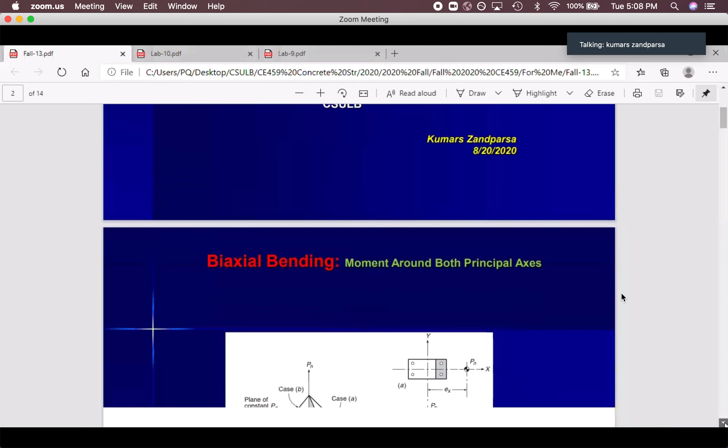Okay, let's go after this. Most of the time, the column has directions. Let me plot something here to make that more clear. Imagine if we have a frame, one story frame. When you put load here, you will get a bending moment on this column in this direction, around this axis. That's the moment based on this load. If we put load, it will bend the column like this.

But most of the time, a frame has two directions, so you have frame at that side, and also you have frame here as well. So you have some load here as well, and it can bend the column in the other direction. In this case, if I follow this line, we will get another moment around that axis. So you will get moment around both axes, around y and x, as you can see here.

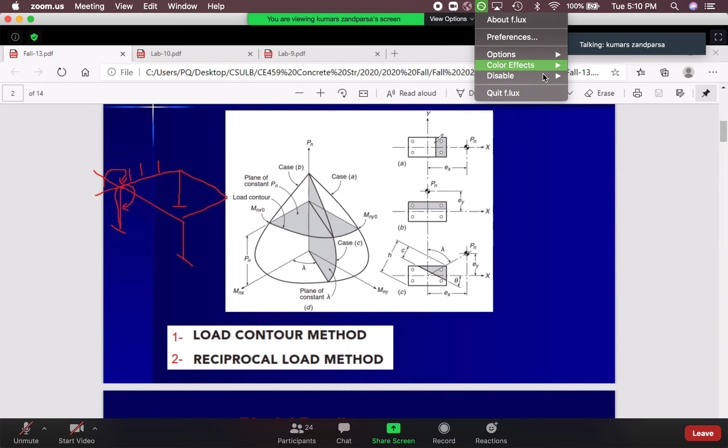In this case, you have ex, ey is 0, so you have bending around y. You have ey, ex equals 0 - look, the load is here, so ex is 0 because ex equals 0, it's on x equals 0. But the offset from the x direction is ey, so you have moment around x, moment around y. That's moment around y on this case, and moment around x you will get at this side.

Then your column will carry both of them together if you have both together, so you have ex and ey at the same time, like this column. You have eccentricity from the x direction and y direction, so you have two bending moments on one column. In this case, the calculation for this is not the same, and it's very hard actually.

Recently I worked on this part, and I came up with a solution to make that easier than this. There are different cases for how to design a column with bending moment around both axes. These are two of those methods. So I'm working on it, and I came up with a solution.

Hopefully, if I can find time, I'm going to put these together and send that to ACI for publication in the ACI journal, and also in the future we can use that with another method for columns with moment around both axes.

So it's very interesting stuff, and it's not that easy. But this method made it easy. I'm going to teach you the reciprocal load method, and hopefully you'll see it's not that hard. Just follow the instructions step by step and find the moment.

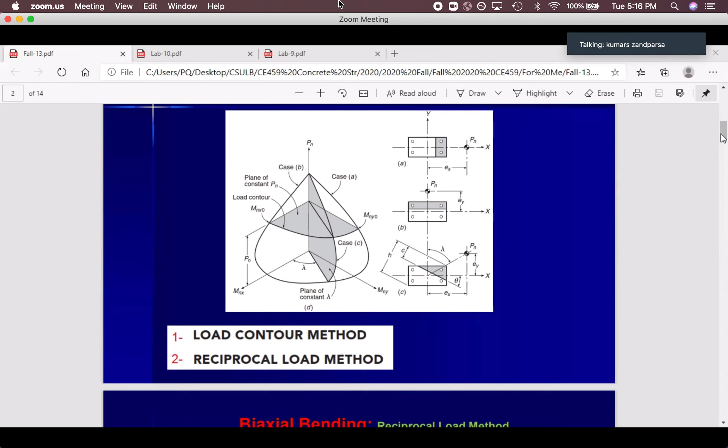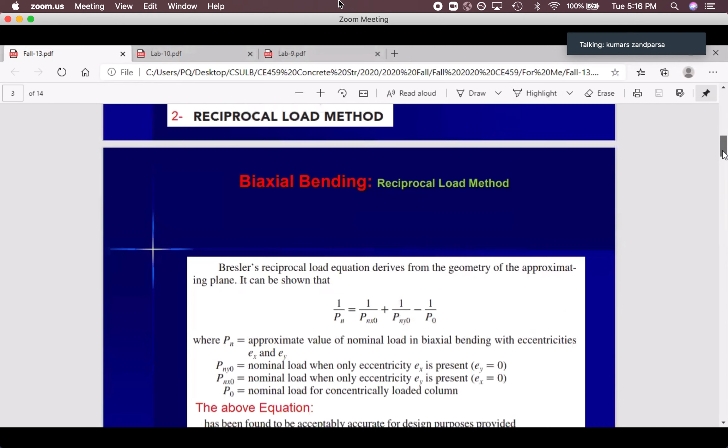But there are some cases where you can do it, like plotting this and finding the curve, then checking if your point is inside, on, or outside. That's the system that will work with no limits. So if you'd like to do that, please let me know, I'll be working on that. It will take time, but at the end, it's very sweet to solve that problem.

Okay, let's see how we can solve this problem based on the reciprocal load method. Okay, that's the equation. We have to just find this, and based on this, find Pn and compare that with the load from outside.

So these are based on the capacity, based on the material. Okay, what's this part? Pn is the approximate value of the nominal load in biaxial bending that the column, with that rebar arrangement and size, can carry. So that's the final load, the nominal load that this column can carry.

This is provided, so phi Pn will give us Pu provided, and we can compare that with Pu coming from the load. If it's more than that, we are good. If it's less than that, no good. Okay, what about this one?

Just remember, as soon as you see this zero for Pnx, it means EX is equal to 0. Look at this, EX, it's not too hard. X0, EX0, Y0, EY0. When EX is 0, it means that we have eccentricity around Y, because EY is not 0.

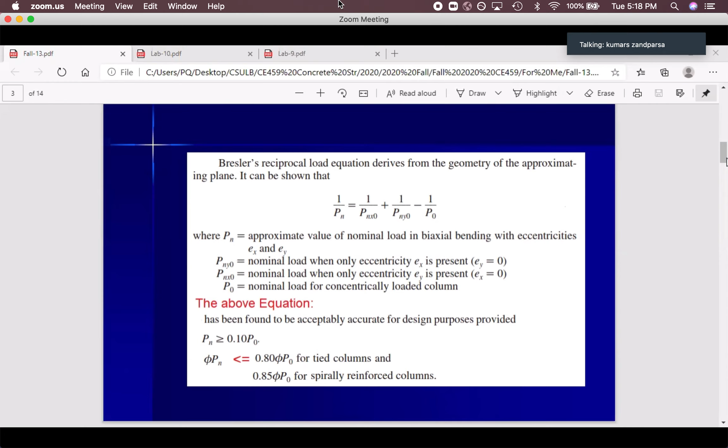Look at this, EY is not 0. Let me show this again here. In this case, your EX is equal 0. Look at this, from here, perpendicular to X, your EX is 0. But EY, you can see from here to there is your EY. So whenever EX is equal 0, but you have EY, it means that you have moment around X. So Pn times EY will give you moment around X. You can see this one will rotate around X. So EY, moment around X. EX, moment around Y. Just remember.

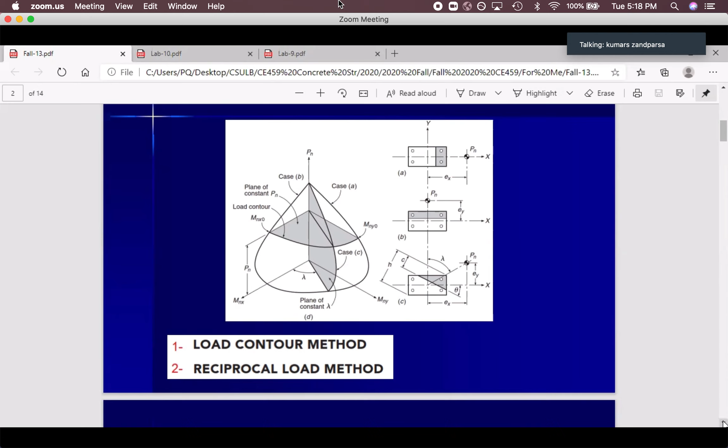In this case, EY is equal 0, you have EX, means MY. EX, MY. EY, MX. Not that hard to accept this one. So what was the rule? For this one, X0, EX equals 0 means we have EY. So in that case, you have M around X. M around X when you have EY. EY, M around X. PNY0 means Y, EY equals 0. We have EX because EX is not 0. So you will get moment around Y.

So nominal load when only eccentricity EX is present, EY is equal to 0. This one, nominal load means axial load, that when you have EY only and EX is equal to 0. So these are the definitions. So we have to find this, we have to find this, and then find nominal load for concentrically loaded column. It means no EX, no EY.

How can we calculate that? AS FY, AST FY plus 0.85 F prime C times B times total B times D minus AST. You can remember that's the start of the column that we learned. So with no eccentricity, this is P0. Today I'm going to solve an example, and you can see how we can find all this stuff.

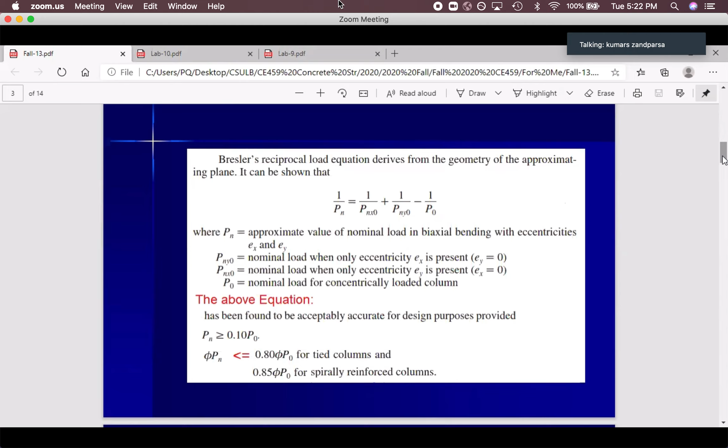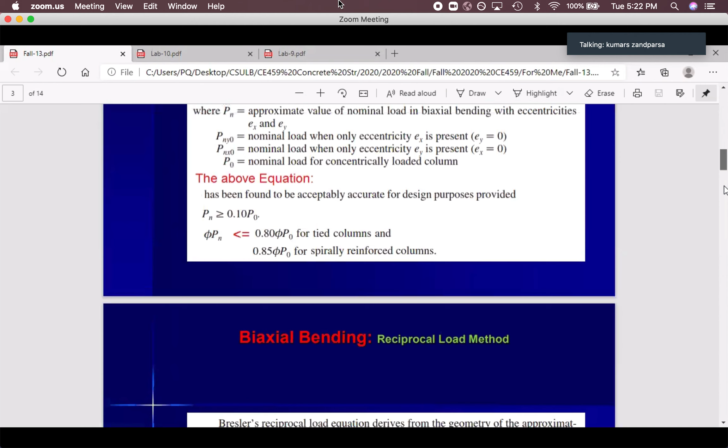Is phi equal 0.65? That's correct, that's for the column. Always a very good question. Yes, it's all for the column. And I will talk about this in the example as well, but good point.

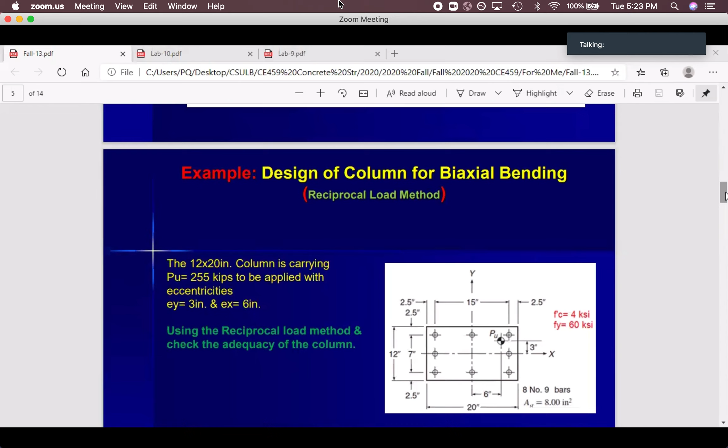Okay, imagine we have a column like this, with this rebar. Actually, we have 8 number 9. We have all the distances, we know the size of the column. So which one is B, which one is H? Because we have eccentricity from both sides.

No, we don't know which one is H and which one is B. In this case we don't know, but because we have to find Pnx0 and Pny0, it means eccentricity around one axis only. In that case, we know which one is B and which one is H. So right now there's no difference between B and H for us, we just know the dimensions.

We know the total Pu from loading is 255. We know the eccentricity EY is 3 inches and EX is 6 inches. As you can see, EX from here to here will create moment around Y, MY from EX, and MX from EY. I hope it's completely clear. You have 3 inches, so it will rotate around X, that's EY. You have EX which will rotate around Y. So we have this eccentricity.

How can we calculate this from the moment distribution for the frame? At first we have to analyze a frame. You have a 10 story frame, do the analysis, look at this. Let me make that one more time clear, because these are the bases. If we don't know the bases, all this knowledge is not that useful, because we don't know why we are doing that and how we can get those numbers.

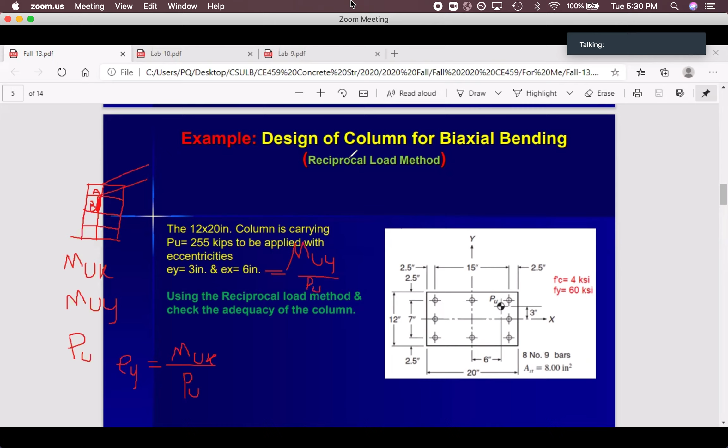Did I give you the answer? Somewhat. Thank you, Professor. Okay, very good. So is there any more question?

Okay, hang on. So for yes, this one, we just solve for MUX and MUY with the equations that you wrote down. That's correct, because those are the maximum moments.

We are not - if this column can carry PU with MU max and MU max, for sure it can carry PU with MU min, because the moment is less. So for sure, this column can carry the minimum when it can carry the maximum.

Clear? Yeah. Okay, very good. It doesn't seem too hard. Yeah, I think it's not that hard. Just follow the instruction. When it's not that hard, it means that you started reviewing. You did review. Yeah. If you are not reviewing and you are not just doing whatever you should do, it should be hard anytime. But it's very good, I can hear that it's not that hard.

Perfect, I like to hear this. Okay, so but then why do we need F prime C, Fy, and number 9 bars and AST if we don't really need that to solve for MUX and MUY?

Look at this, those are based on the loading. I have to find the capacity, okay, then compare the capacity with the loading. Yeah, okay, these are based on the loading. Then we are using size of the column and the rebar. Then we have to find the capacity. The capacity must be greater than or equal the load from outside.

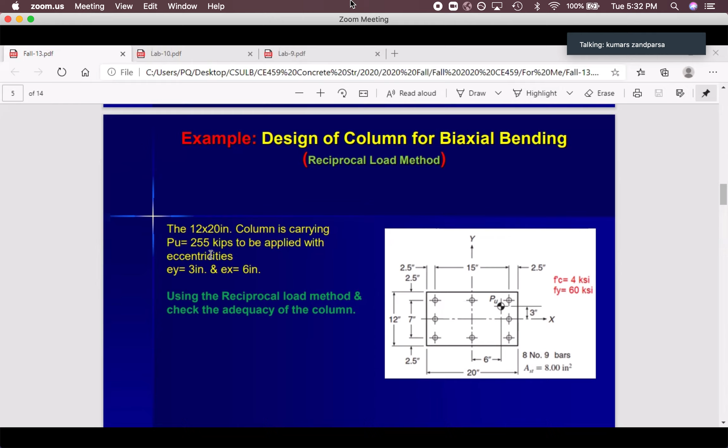Clear? Yeah, perfect. So because of that, these are loading. Then we have to find the capacity based on the material. Compare this with that to see if the column can carry the load or not. Okay, let's go and see what can we do.

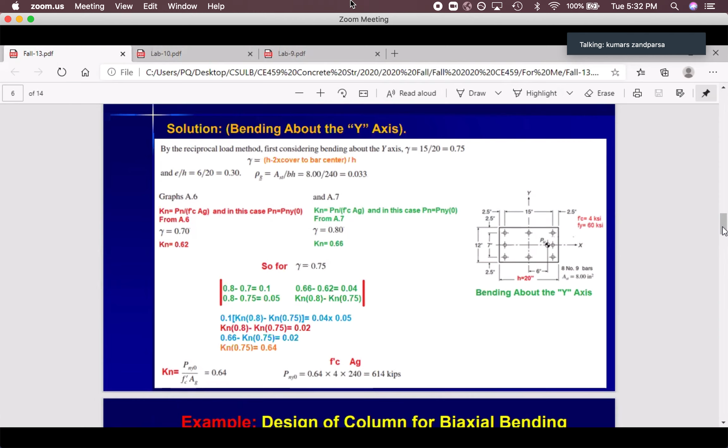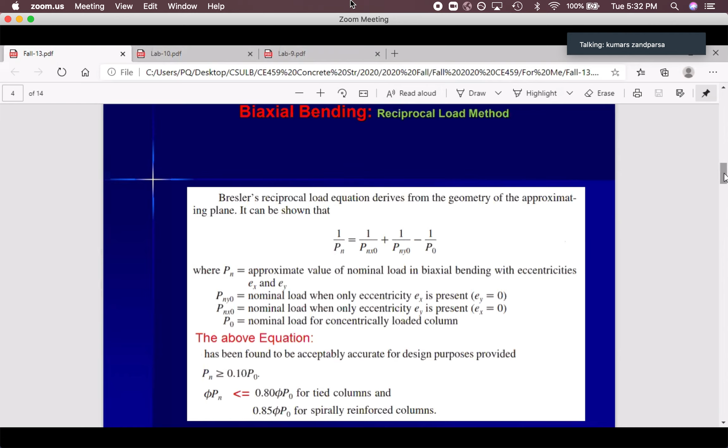Step by step, we know that equation 1 over Pn, yeah, we have to find all these parts. Right now we have to find this part, and this part. Pnx0, Pny0, P0. Then put this in this equation, find Pn. This Pn is your capacity. Then phi Pn will give us Pu capacity, and we can compare that with this Pu. That's it - if it's greater than or equal, we are good. Okay, so step by step, we have to follow that instruction.

First of all, if we go with this direction, means that if we go H here - look at this, H at this side, H at this side - means that we have EX, EX. So in this case, EY is 0. Yeah, bending about Y axis means that we have EX. EX is 6 inches. Okay, so we have moment around Y. In this case, H is parallel to E. Look at this, so that's your H. This is your B, because we have moment around one axis. So B and H is important to be able to use the ACI.

If we are not using ACI method, B and H doesn't matter - you can go with H here, B there, just those are names. But because we have this gamma, which is equal to H minus cover divided by H, in this case we should know what H means for ACI. H parallel to E, okay.

In this case, we have EX, so H is this one. H minus 2 cover means 20 minus 2.5. Minus 2.5 cover means to the center - this cover to the center. We'll get 15. 15 divided by H, 0.75. Okay, so that's the equation again. I wrote that, but we know that already.

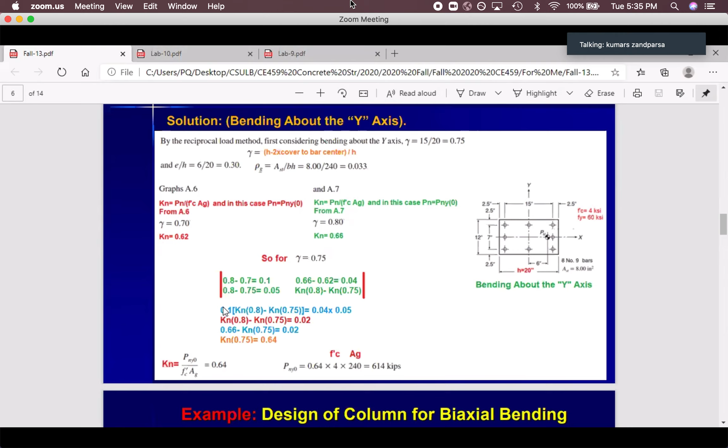Just refresh your memory, interpolation should be from high school. It's not that hard to actually remember, but still I show that here one more time to calculate that.

So at first we need A6 and A7. As you can see, equal rebar at either side. Why do we need equal? Because we have moment around both directions. If we have moment around one direction, it's better to have rebar just at one direction.

Those directions should be parallel to E. So if you have MY only, rebar here, rebar there is the best. You don't need to install rebar in the middle, it's not carrying that much load. But when you have EX and EY, you need it at 4 sides. That's the best rebar arrangement when you have moment at both directions.

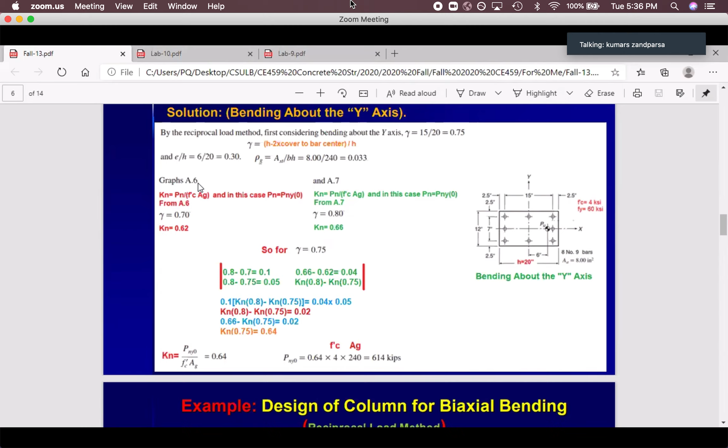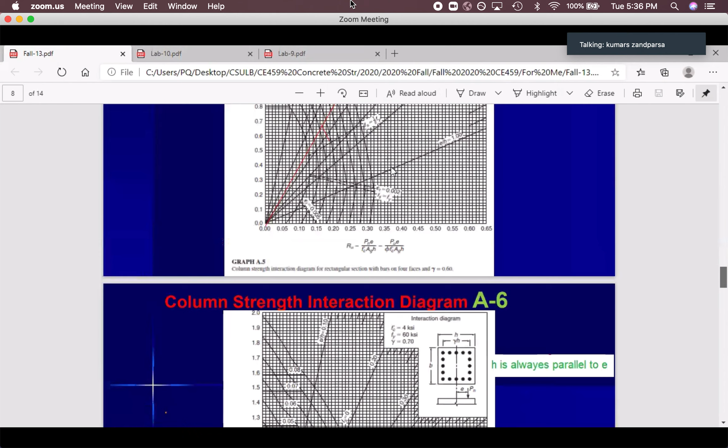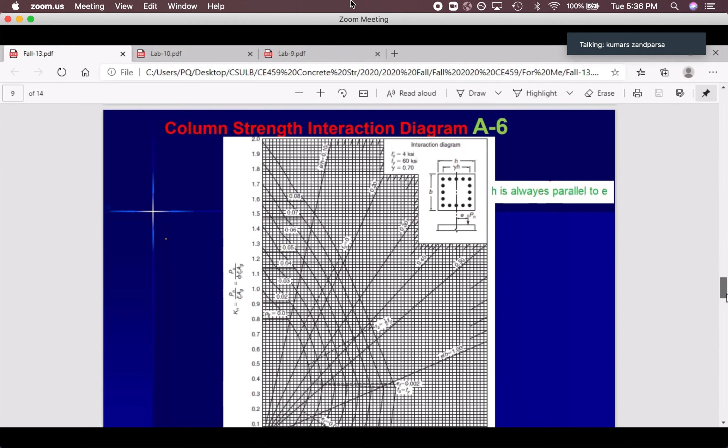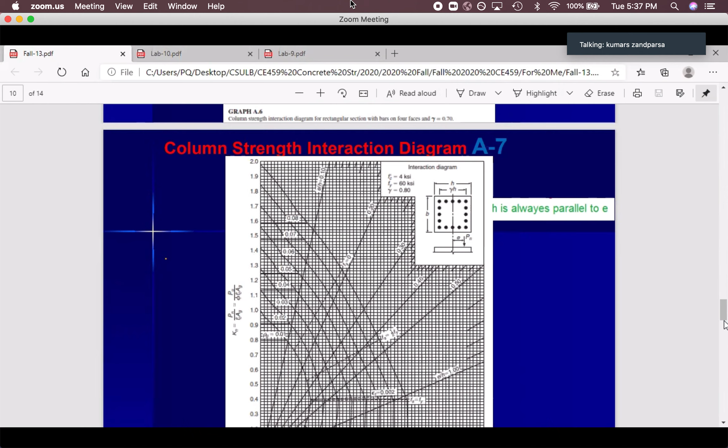Then based on these results, find for 75. We can calculate for 0.7, 0.8, and then for 75 we have to interpolate. That's why I wrote this here, like this one from graph A6 and A7.

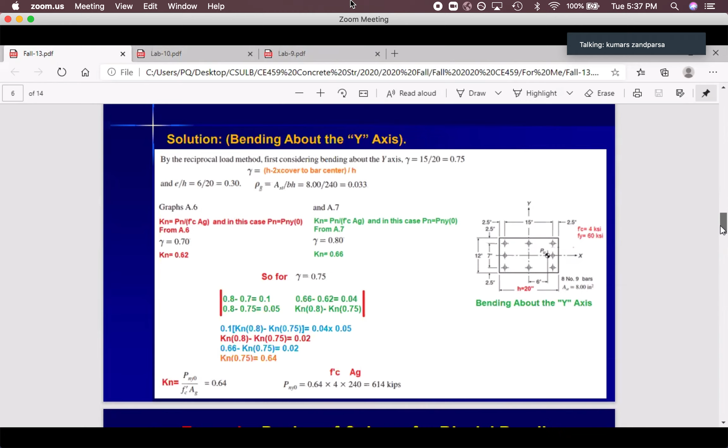Okay, from graph A6, based on E over H and rho G, let's go to that one, 0.33 and 0.3, 0.033 and 0.3, A6. EH is 0.3, okay, we have 1, we have 0.5, 0.4, 0.3.

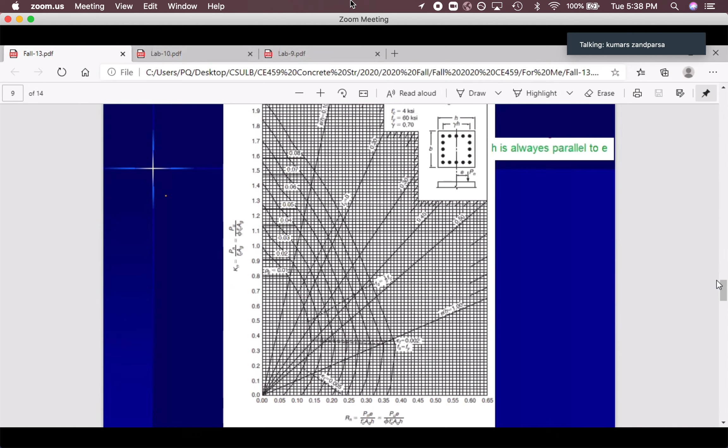So 33, this is 0.3, 0.4, 0.35, 0.3, somewhere around here. Imagine this is the point. From here, just make a line and read this number, 0.60 something. That's the number that we can read from A6.

Let's back here. From A6, Kn is equal to Pn divided by F prime CAG, 0.62. One more time, let me show that to you to make sure that we got it correctly.

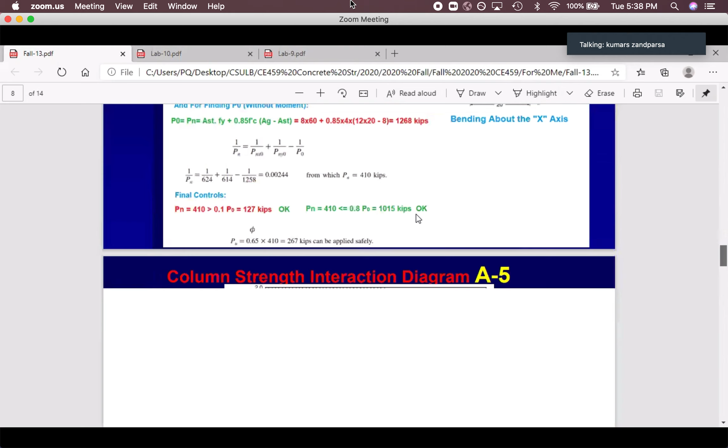So E over H is 0.3, that's it. That's the E over H, you can see this is E over H, all these lines. E over H 0.3, percentage of rebar 0.033 means 3.3%, this is 0.3, this one is 0.3.

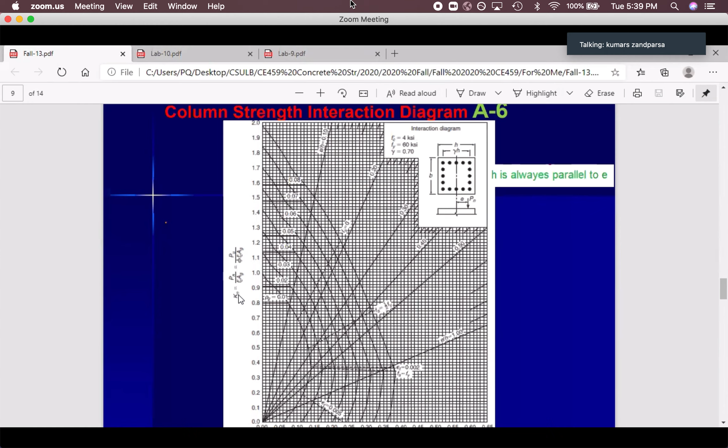Or you can write that based on Pu, doesn't matter. So we went with this Kn, we read that 0.65, Kn 0.65, and it's Pn over F prime CAG. Why did I write that Pn X0? Because right now we are considering that over here.

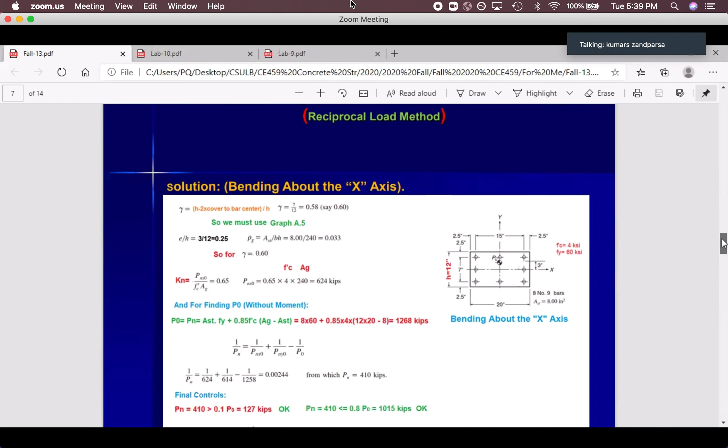And this Pn, as you can see, is when Ey is equal 0, so we call that Pny0. Over here we show that Pn, but this is our Pny0. Because as you can see, Ey is equal 0, so we call that Pny0. If we put this Pu over here, the Ex equals 0, then we call this Pnx0, because Ex0 over here, Ey0, Pny0.

So those are the definitions. Then this is for 0.7, but I want for 0.75. What should I do? I have to go to A7, do that again for 0.8, gamma 0.8. And I went there with these two numbers, 0.3 and 0.003.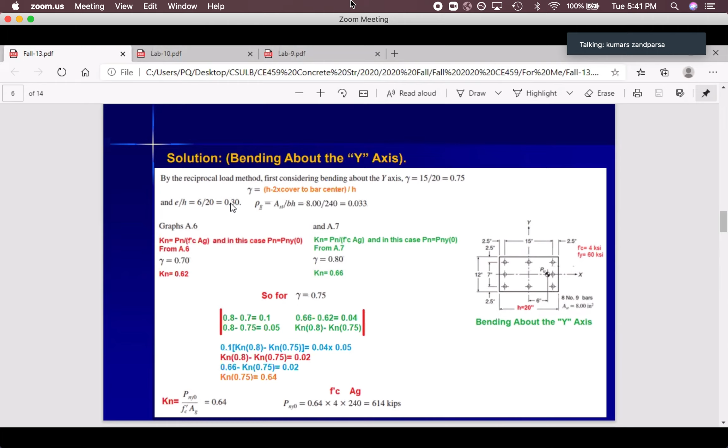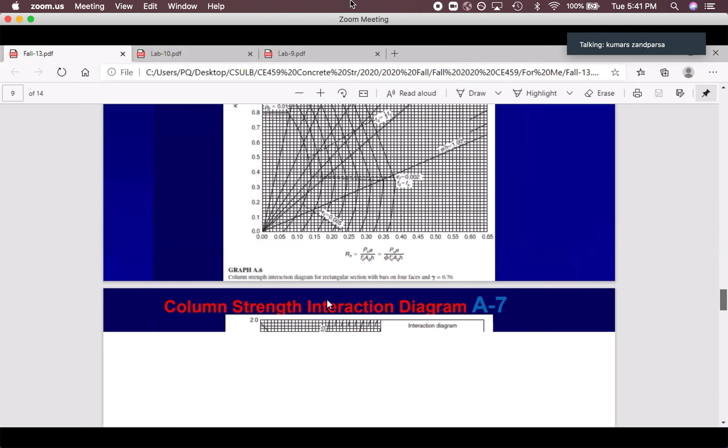I went to the other one again, to A7. Again, 0.3, 0.033, somewhere around here. Go this way and read that number, that's it. Do the same for A6 and A7. We did that and we read Kn 0.66.

Perfect. Then 0.75, how can I do that? That's the method, I wrote that for you. If you know another way, just do it your way, just make sure that you are getting the same answer. That's it. Okay, I started with this side. Look at this, when I started with this, always I have to start with it.

If you start with that side, it doesn't matter. You can write 0.7 minus 0.8, but keep this consistent for all four sides. This one first, that one second. I started with this one first, the bigger number, so 0.8 minus 0.7 means 0.1. Always do the same: this side minus that side.

The answer for Kn again, because I started with Kn minus, so delta gamma, delta Kn. Delta gamma is 0.1, 0.8 minus 0.7. Delta Kn is 0.66 minus 0.62. That's it. Then if I want to find this one, again go with this minus this, because we always start it. So for 0.8 minus 0.75 means this difference. The Kn should be Kn for 0.8 minus Kn for 0.75. Look at this, that's it.

That's the determinant you can write: this one minus this one, delta gamma equals delta Kn, this one minus this one. For here, for the one that you want, delta gamma should be 0.8 minus this, delta Kn should be this one minus Kn for that, which we don't know. Kn for 0.8 minus Kn for 0.75. We know Kn for 0.8, but Kn for 75 we don't know. How can we calculate this?

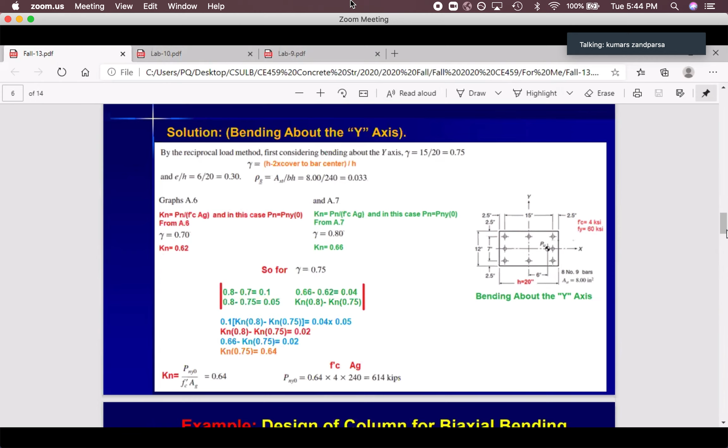So in this case, we have eccentricity at Y, Ey, and Ex is 0. So we call this Pnx0 because Ex is equal 0. So in this case...

Gamma is, as you can see, which one is your H? H is this side, parallel to E. As you can see, I wrote that this is your new H, parallel to E for ACI charts. So H minus the cover means 12 minus 5 is 7, as you can see, divided by H, 12. That gives 58 -- 58 is not a number that we have.

In this example in the book, they just consider, okay, 58 is very close to 0.6, so we consider 0.6 and they didn't use interpolation. But for you, please, if you got something like this, go with interpolation based on that.

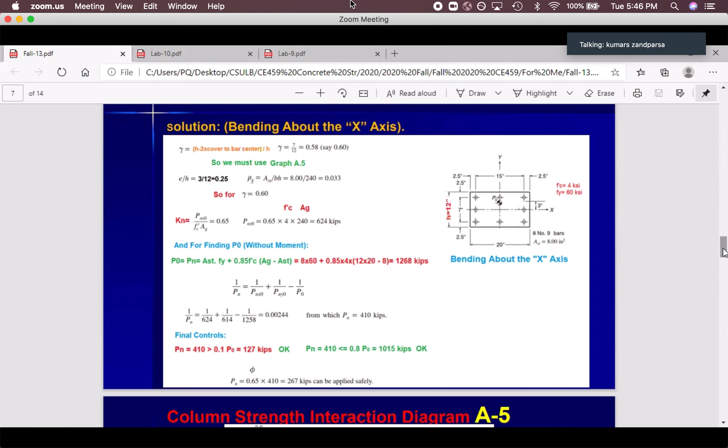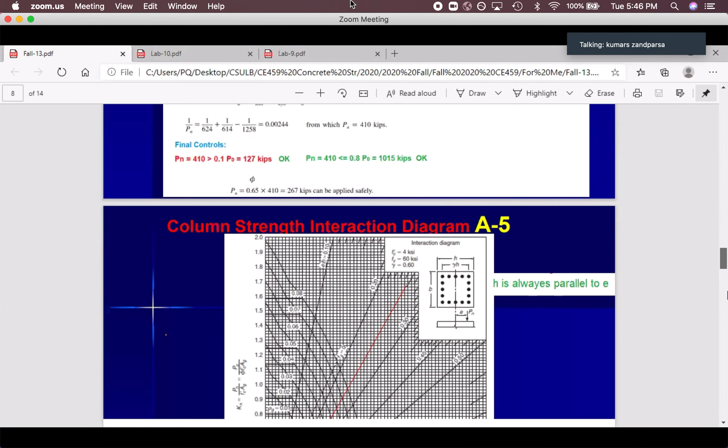What chart should I use for 0.58? 0.5 and 0.6 for this one, yeah, because 0.58 is between 0.5 and 0.6. So I need to have the two charts, 0.5 and 0.6. As you can see, I have 0.5, 4 equal sides, rebar on 4 sides equal, all of them, A5, A6, A7. That's important, you shouldn't go to one that has rebar at 2 sides only.

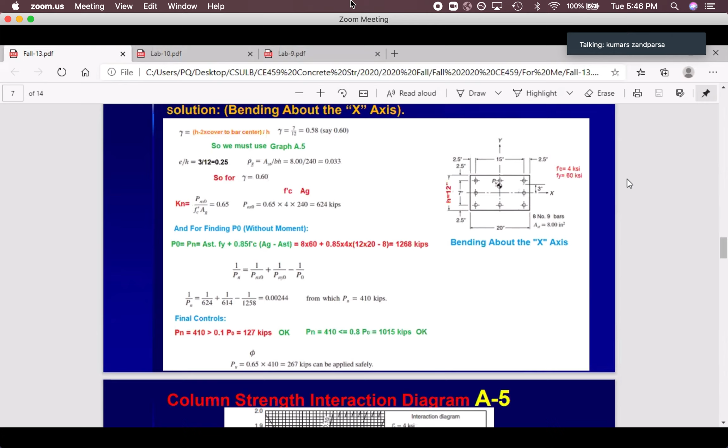No. So in this case, if I want to solve this, I will go with 0.5 and 0.6. Do the same as this one, just follow this instruction. Go A5 for 0.5, A6 for 0.6, and follow this instruction. Then for gamma equal 0.57, 58, find that gamma, and based on that Kn, for that Kn, that's it, you are done.

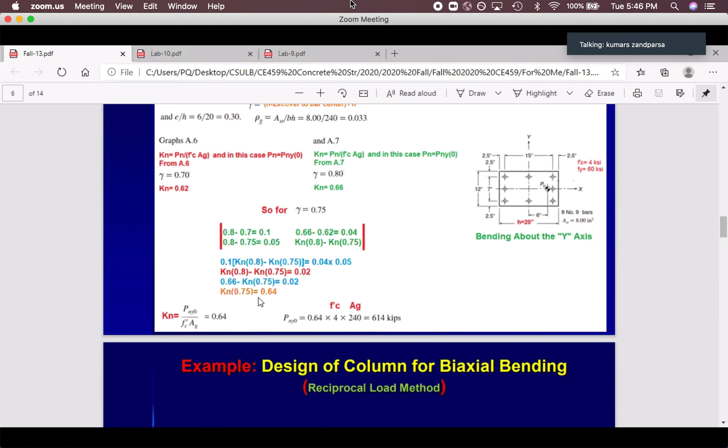Over here, they made that easy and considered, okay, it's very close to 0.6, we will go with 0.6. But please, you shouldn't do that at first, or only after you got experience. After a few years of experience, you can see the difference is not that big, so you can go with this. But until then, please follow this instruction: go and find the numbers between those two charts.

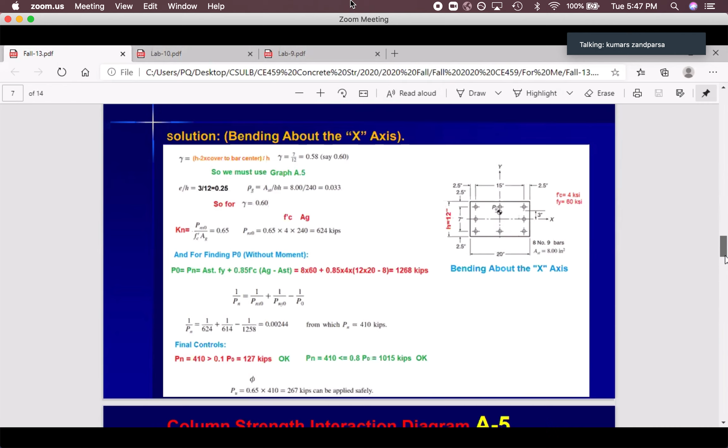That's it. So in this case, because we went with A5 -- actually, we went now, I think I wrote that wrong. I should write this point A6 because A5 is... yeah, no, that's correct, for 0.6, that's correct. Yeah, so we went with 0.6, not between 0.5 and 0.6.

So they use graph A5. Okay, for graph A5, do the same. Eccentricity divided by H, we have 3-inch eccentricity divided by H. In this case it's 12 inches. Yeah, 0.25. Rho G, total AS, same as before, it's not changing. And go to gamma 0.6 and read Kn.

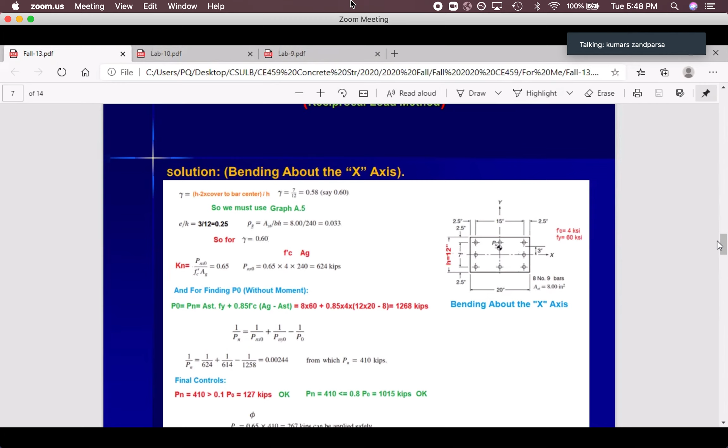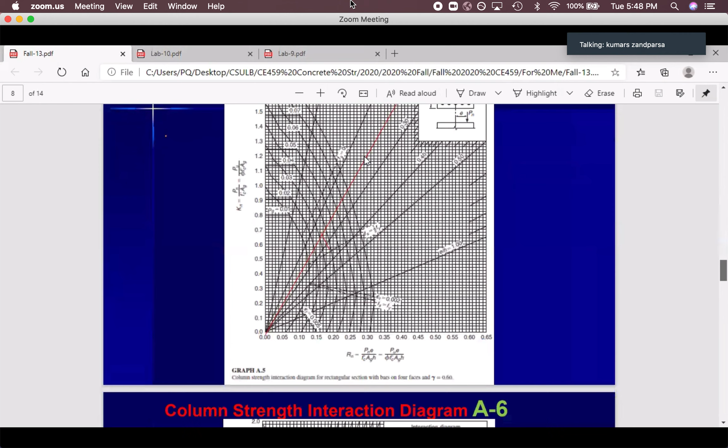So in this case, if we accept this, that is 0.6, there is no need to calculate Kn, just read that from the chart. So with that 0.033 and 0.25. In this case, 0.25, you can see 0.20, 0.30, 0.25 is at the middle. This is E over H equal to 0.25.

And then I tried to show that 0.20, the percentage, 0.33. Look at this, over here I show that I couldn't plot a graph like this, so imagine this is the correct point. So that's 0.33. This is 0.3, 0.33, 0.4. Then go from here and read this number, that's your Kn.

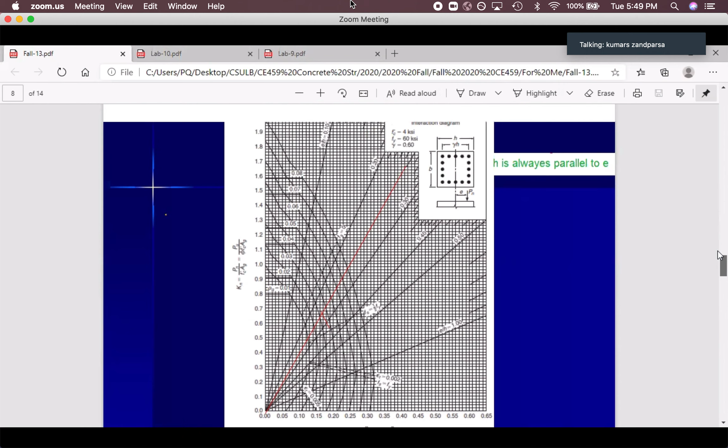Okay, we did that. Based on this Kn, we got 0.65. Okay, 0.65, we know that this is Pnx0 because Ex is equal to 0. We have Ey. So we calculate Pnx, then how can we calculate P0?

That's the easiest equation that we know from the start of the column: AST times Fy plus 0.85 F prime C times Ag minus AST. Sometimes we consider this, sometimes we say okay, it's not that important, but if you want to do the best, always consider this.

Until you got that experience that for very big size column with small rebar, you can neglect that. It's not that big a difference between considering or not considering that. Until then, just consider it. So in this case, we calculated P0, PNX0, PNY0. Put them in this equation.

Plug in, yeah, 1268, I think. I'm not sure, I think it should be 58. Forget it, yeah, I think one of these two is not correct. Yeah, I think maybe this is not correct. 1258, not 68. It's not that important.

So put that number here. Then PNY0 from other page, 614. PNX0, 624. Put this in this equation, you will get this. Inverse this, you can find PN.

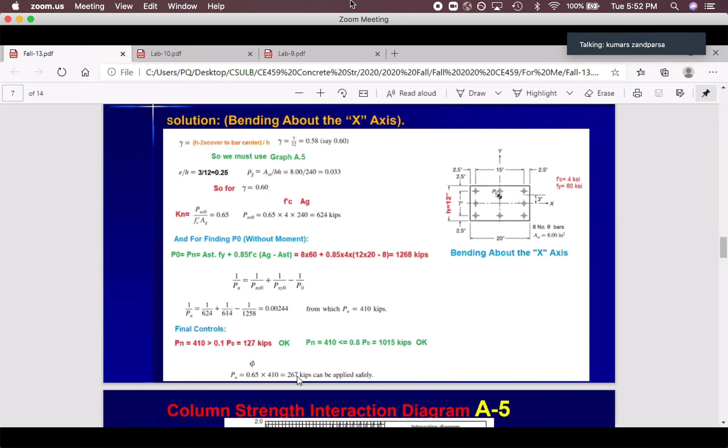And as you can see, PN, just we didn't change anything, everything PN. Then find the capacity. PU capacity should be phi times PN, the final PN that we calculated for this. Phi times that is PU capacity. Then compare this with the loading that we had from the outside. As you can remember, this load was 255 PU.

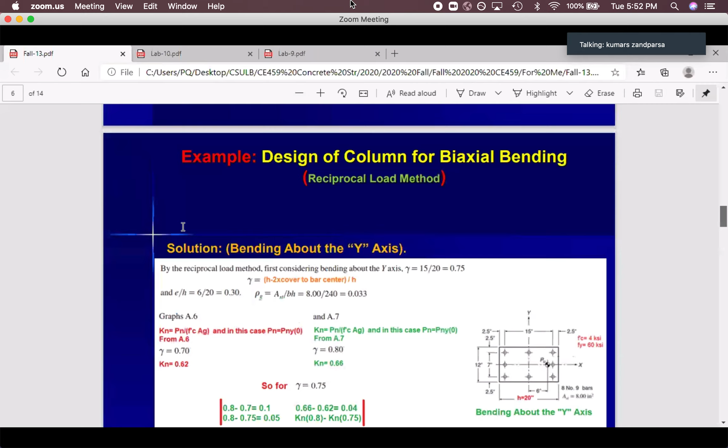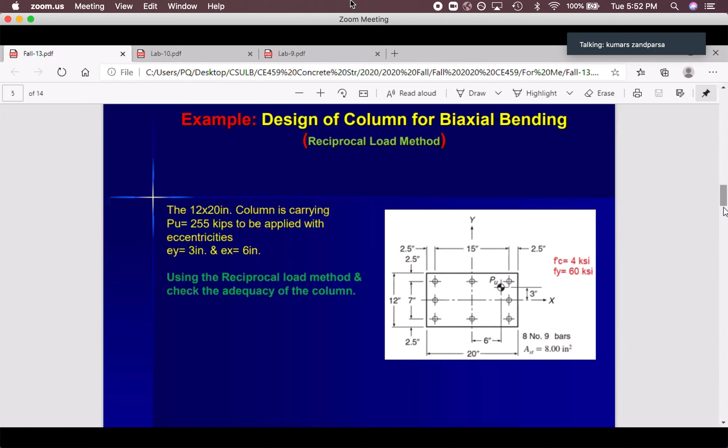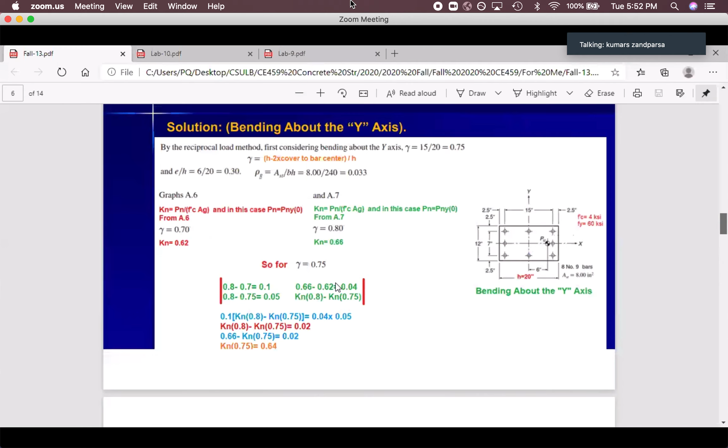Yeah, that's coming from the actual analysis of frame analysis. We got that 255. So our PU that this column can carry, we consider 267. It is greater than 255. So we are good, so the column is good and it can carry the load.

So any questions so far?

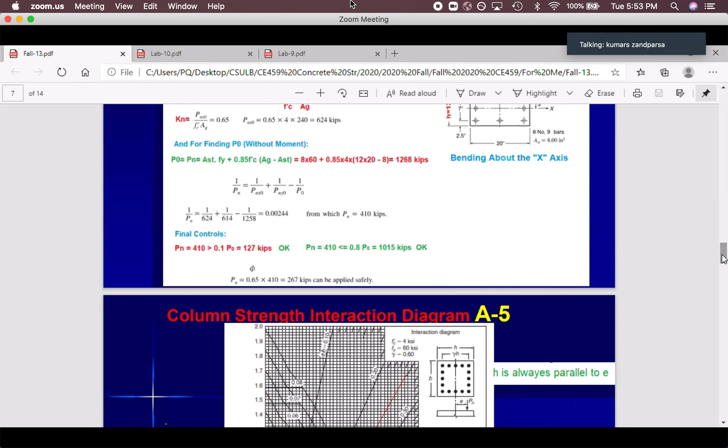Yes, just to make sure, P0 is the tension, right, professor? No, it's compression, everything here is compression. No, it is axial load without any moment, axial load without any moment. So it is that pure axial load. This column can carry this much pure axial load when it's short, it can't buckle. Yeah, so that's your P0. Clear?

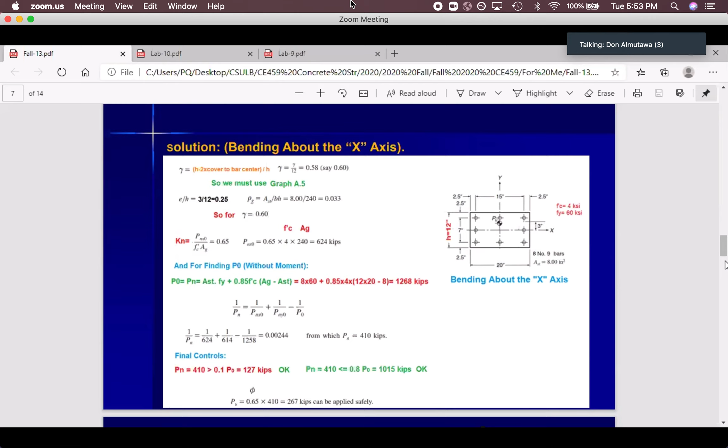Yes sir. Okay, any other question? Yes, to get Kn in the graph, we see E over H and rho G. That's correct, where they meet is the Kn. No, where they meet, look at this. That's your rho, yeah, you got 3.3 means 0.033.

It's here. And E over H is 0.25. Over here, when they meet, from here make a horizontal line and read Kn. This line is Kn, that's correct. From here, go this line. And you can, just remember, you can ask why you should always go vertical, horizontal. Why you shouldn't go downward? You can go downward as well.

You can find Rn, but in Rn you can see Pn times E. We have one E, we have to do extra work here and then find H. So that one has less parameters, and because of that, we read Kn. Okay, clear? Yep, perfect. Any other question?

Don't worry if your question is too easy. You might think, I'm not sure, maybe I'm asking the wrong question. Doesn't matter. Even if your question is completely wrong or something you should already know, I won't say, why don't you know this. No, I'll give you the answer. Please ask your question to make things clear before the end of this lecture. Then tonight you can start imagining about this and review it yourself. That's the way you can learn this faster.

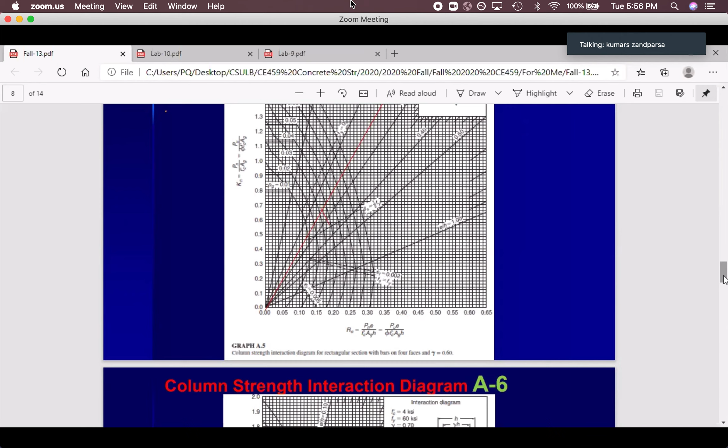Doesn't matter if we even pass this and then you remember a question, you can ask, and I will go back to this again. This is your homework. As you can see, do the same. I gave you MUX, meaning MU max. You had two MUX, pick the maximum, and these are the results.

And with one PU. Okay, and you have EY and EX. I gave you EY and EX. I think I should have that somewhere too. Okay, look at this, I didn't give you EX and EY. Can you solve this problem?

Yes. How? You divide MUX by PU, and dividing MUX by PU gives you EY. MUY divided by PU gives you EX. Very good, yes.

So I can give you EX or EY, or I can give you MUX and MUY. Just remember, MUX divided by PU will give you EY. Remember this, otherwise everything is wrong, because you will go with different axes perpendicular. If you consider that EY wrong, you will get different numbers. So MUX, look at this, when you have EY, you have moment around X. Moment around X divided by PU gives you EY. Moment around Y divided by PU gives you EX. That's it, so now you have EX and EY.

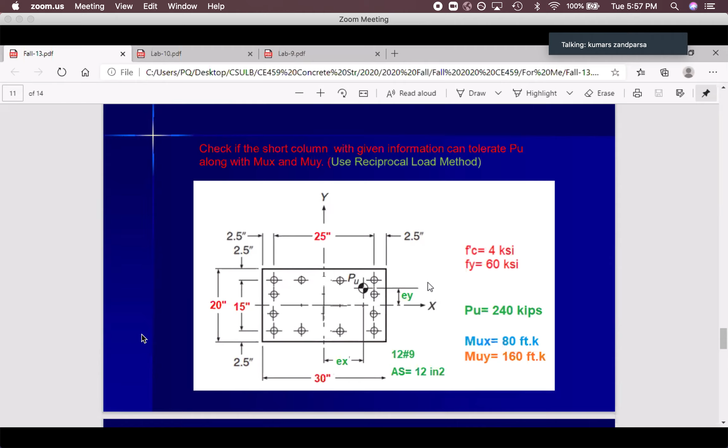Then solve this problem exactly the same way, and just do not assume 0.58 equals 0.6. Just go and find the information.

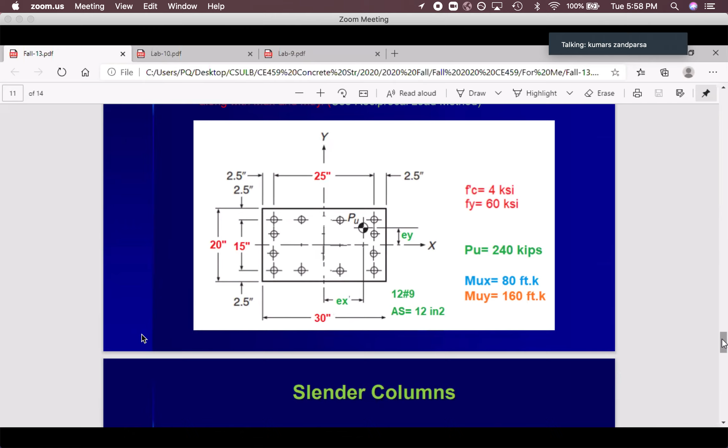Actually practice this. I think you are one of the good classes so far that got this very fast, because I remember for other classes I spent more time explaining that, and they still struggled understanding that stuff. But I think you got it, and that's very good.

But please practice right after this, because right now it's in your short memory. Tomorrow you will lose some part of that. Then 2 days after that, 50% is not in your mind, so you will lose 50%. After 3 days, 70%. So do it tonight, review it, try to keep it in your mind, and make it ready for tomorrow to solve the example and then the homework.

Okay, we are done with short column. Short column is very easy, because you have no concern if it can buckle or not. But for slender column, it might buckle. What's the difference between these two?

Look at this, that's a very important concept from strength of materials. Imagine I have a column, a piece of wood or whatever, and I put force on top of it. It means I have the same load at the bottom side, because when you push it, you get the same force at the bottom. Because of that, it's stable. Sigma Fy equals 0, otherwise it's not stable.

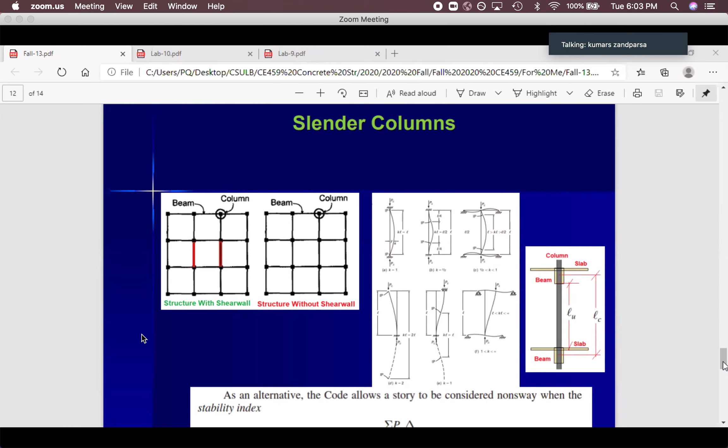Yeah, okay, perfect. So this is a concept that is a little higher than BS degree, but I will talk about this to let you know that it's part of your knowledge from now. You can use that in higher degrees as well, or in any firm that you are going to design or go to actual work.

So imagine you have a frame. That's a plan view of the structure. These dots are columns, the others are beams. So you have a 3D frame. Sometimes we have shear walls, look at this, I showed them. What's the shear wall? Concrete from this column to that column with the rebar.

It makes this very stiff, we call that shear wall. How to design them? That's for graduate studies, we learn how to design those. Sometimes there are no shear walls, just the frame will work on that one. So the lateral load will be tolerated by the frame, or by a combination of the frame and shear wall. So we have both cases.

And then from the other side as well, I just showed it at one direction. Then for the other side, you might add another shear wall here, or nothing for this one. So no shear wall, with shear wall. Shear wall will actually create some support for the structure, and it can remove sometimes the buckling of the columns, the shear wall—that's the help, big help. So you can use a smaller column with more capacity. So why are we using this?

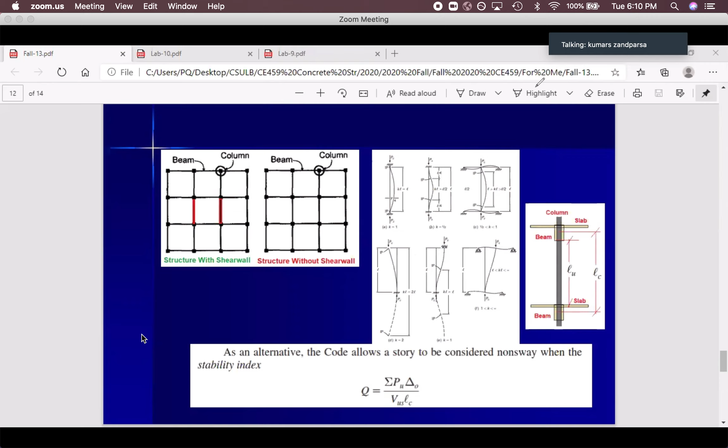Calculate sigma PU, calculate deformation, calculate shear for that story, and LC, center to center of the beams. Just remember. Then those parts, how can we calculate those? Not that hard, don't worry.

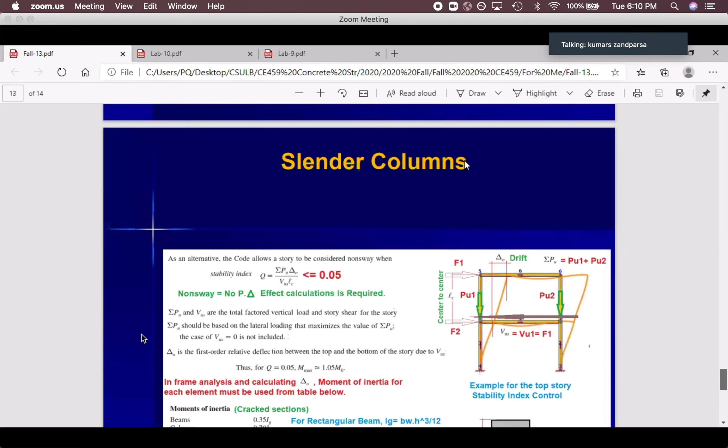I drew something for you guys so you can see those easily. Look at this - imagine you have a frame, just one span, make that simple. You have 2 columns, you might have 10 columns at each story. Then I want to check the stability index for this second story. You have to go story by story. Remember, you cannot say the whole frame is acceptable unless you check all the stories, then you can mention that. But it might actually be non-braced here and braced on top, or braced at the bottom.

So we should go story by story. Even in 3D it doesn't matter - I show that in 2D, but if you have 3D, do the same. What is sigma PU? Sigma PU - add all the forces on the columns for the loading that you have. Look at this, I show that with lateral load plus vertical load for the gravity. So find the loading based on the frame analysis. Then if you have 10 columns in that story for 3D, add them all together - PU1, PU2, PU3, all the way - that's your sigma PU for that story.

As you can see, I didn't show PU for the bottom - no, it's everything for that story. Then I have to do that for this story as well.

Okay, what's delta zero? Delta zero is your drift. What's the drift? Drift is equal to the difference between deflection of the story relative to the story below. So if I'm working on this one, drift is the displacement of this point relative to the same point one story below - that's your drift. Displacement for the top one is from here to here, displacement for this one is from here to here, the difference between these two is your drift. That's it. What's the drift for the first story, from here to here?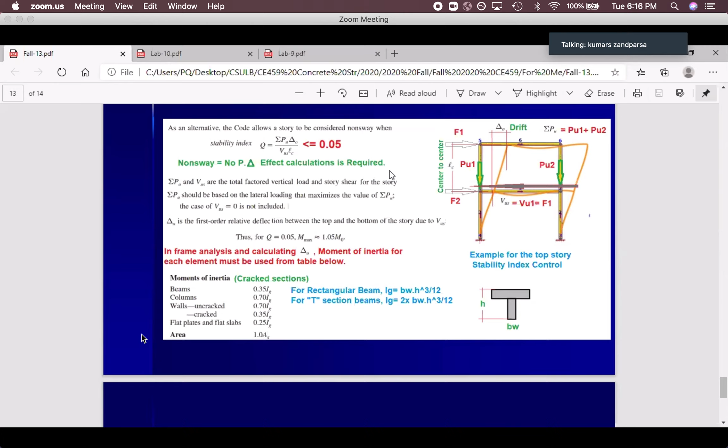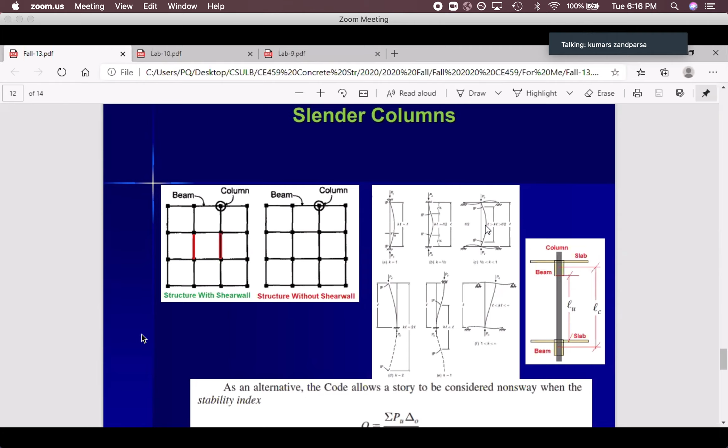What does it mean? It means that when you are in this case, the K, the length of the column for buckling will be double. So you can put less load. Where the length is smaller than the real length, you can put more load. So braced and unbraced will give us this K factor. In this case, we can call that a braced column or non-braced column.

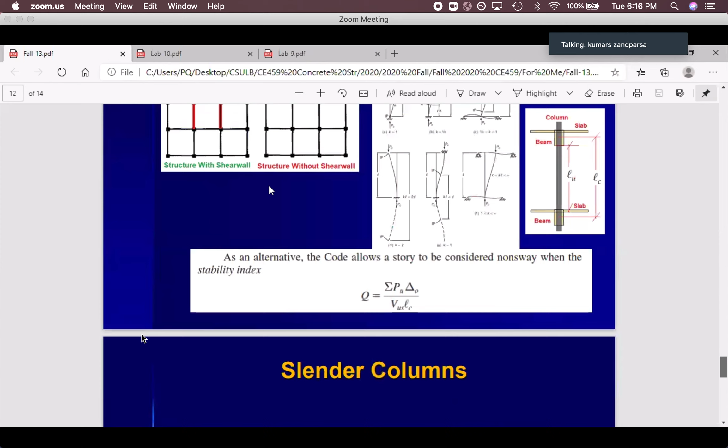So if your Q is less than or equal, it's a braced column, so you can use a K factor less than or equal to 1. If your Q is greater than 0.05, it's called a non-braced column, so you can go with K greater than 1, meaning you can use less load. The slenderness is more critical when it's non-braced. For braced, it's not as critical as non-braced.

So even if you have a shear wall and your Q is greater than this, even with the shear wall, you should consider that non-braced if your Q is like this. So if the shear walls are small, you do not have enough stiffness, so your drift will be big. Because of that, your Q can be more than 0.05. So in that case, actually, the non-braced system will give you a bigger K factor.

Yes, what's the question? Can you repeat? You said, if Q is less than or equal to 0.05, is it braced or unbraced? If it's less than this, it's braced. Okay, braced. If it's greater than this, non-braced, even if you have a shear wall. We think when we add a shear wall, because a shear wall or bracing is for bracing the frame, we call that a braced system, but it's not good enough. We have to check this. If it's less than or equal to 0.05, it's a braced frame.

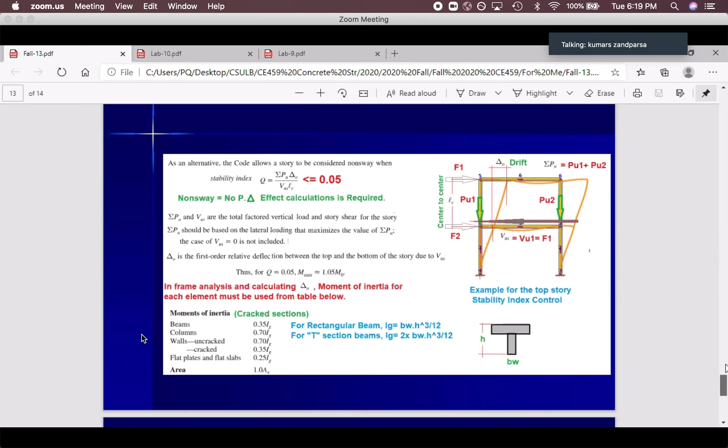You have the same columns, but the effective length of the column differs, which is why I showed this slide. Look at this - you have the same column length, same as this, same as this. But the K factor for each one is different. If you have a case like this, K factor is double - it means you have length L, but the column will act like a 2L column.

So it can't carry that much load. It will act with L if you have this situation - rolling, fixed, and fixed. If you have a connection between a frame like us, you will get a K that you have to calculate, greater than 1. In this case, less than 1, like a braced frame, you can see the effective length of the column is smaller than the real length.

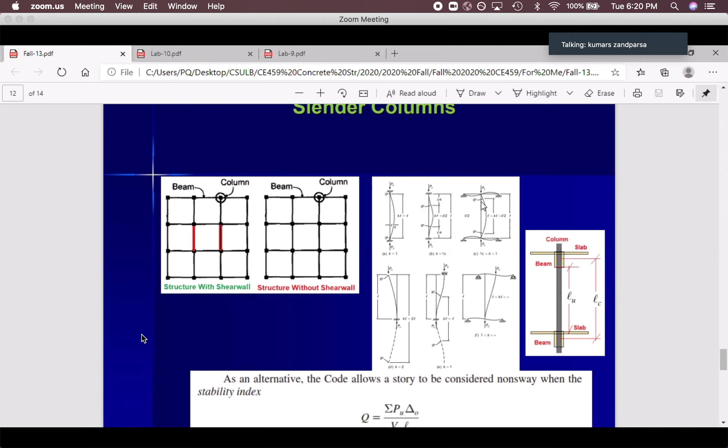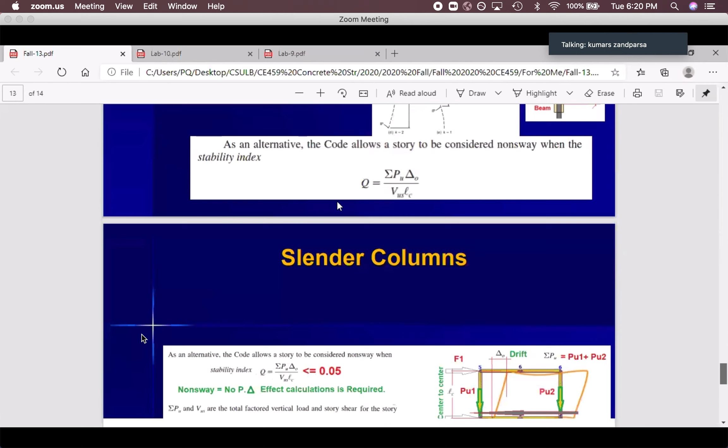So if your Q is less than this, your K factor - meaning length factor of the column - is less than or equal to 1. If it's more than this, your K factor is greater than 1. Is that clear? So then in that case, we would not put bracings for that?

No, you might have bracing, but even with bracing, if that bracing is not good enough, not big enough, you should still consider your columns as non-braced columns.

Professor, so which K will make the column more rigid, more stable? I can understand your question - which K, in which case, Q smaller or less than 0.05, or Q greater? When you look at this, that's the stability index.

When your Q is smaller than this, it's a braced column or braced frame. If it's more than this, non-braced. So for the braced, does that mean it's more stable? The movement is less, so more stable.

Any other question on this? If it was braced, Professor, would that cause it to not buckle? Actually, the movement is less, so the P-delta effect is less. It's not just buckling - look at this.

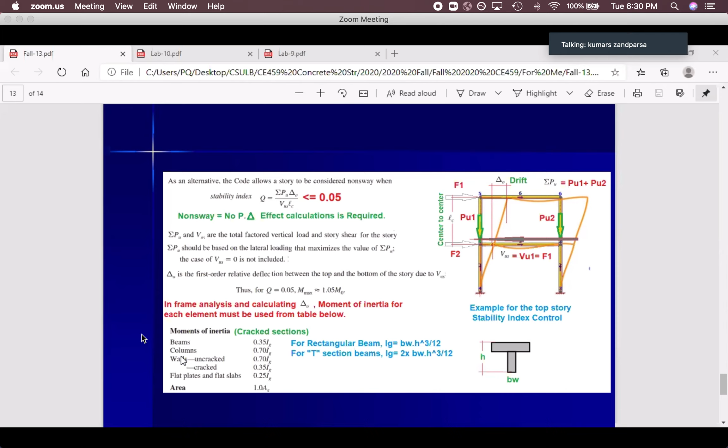Very good, yes. Because if the column is completely under compression with no moment on the column, there's no crack on the column. But a beam is always under moment - there's no beam with no moment, otherwise it's not a beam. So the beam gets a lot of bending moment, so you have tension and compression. In a column, the main thing the column should do is transfer the axial compression load, so it can cover a lot of cracks if it carries a small moment relative to the axial load. So you will not get that much crack - because of that, the cracked moment of inertia of the section is much bigger than for the beam.